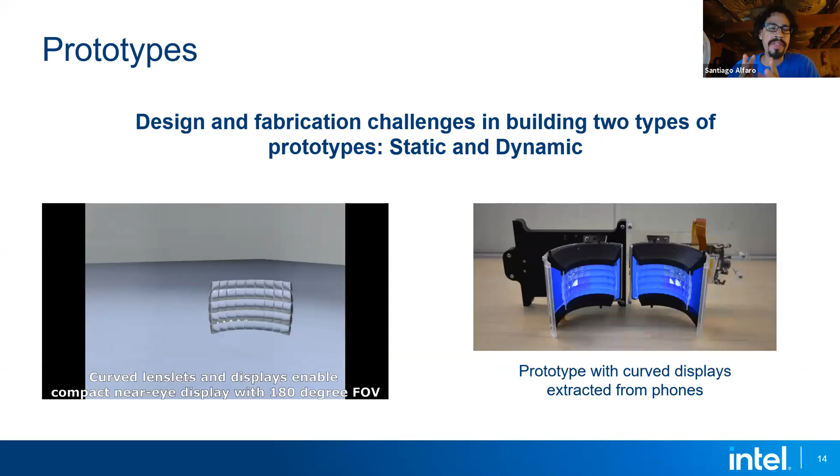Okay, so hello. So for this project, we developed 2 prototypes. As you can see here, one was a static prototype and the second one was a dynamic prototype. The static prototype was using a film and the dynamic was using a couple of cell phone screens. And we'll get into why we went both ways. Each prototype has its own advantages.

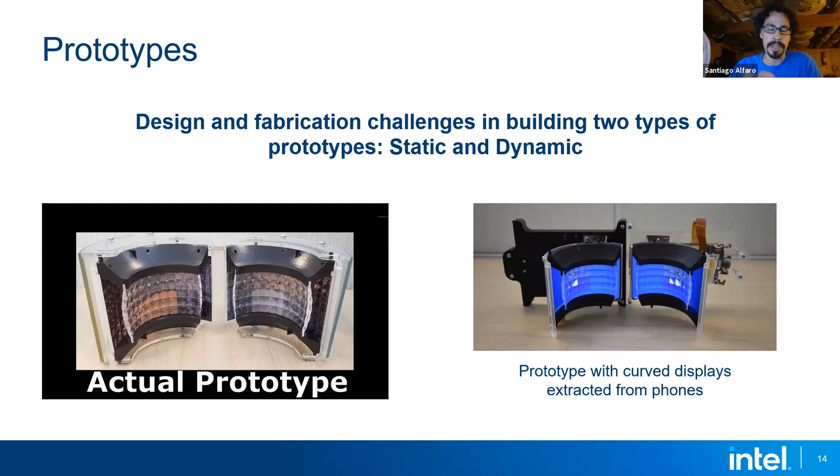So in general, first we have to design the whole thing. There are constraints around the lenses that we need, and there are also constraints around making something for the human face. One of the most critical things that we needed to look into was the interpupillary distance, which is the distance between your pupils. This is a device that is going to be so close to your face that you need to match each individual's IPD.

And in addition to that, there are things, of course, like head size, nose size. I was going to have to make something that was dynamic enough that everybody would be able to use it. And then things that I couldn't move, that I had to work with, were things like the screen size, since we were going to use a cell phone screen, and the focal length of the manufactured lenses. So all of these things had to be taken into account for our final designs.

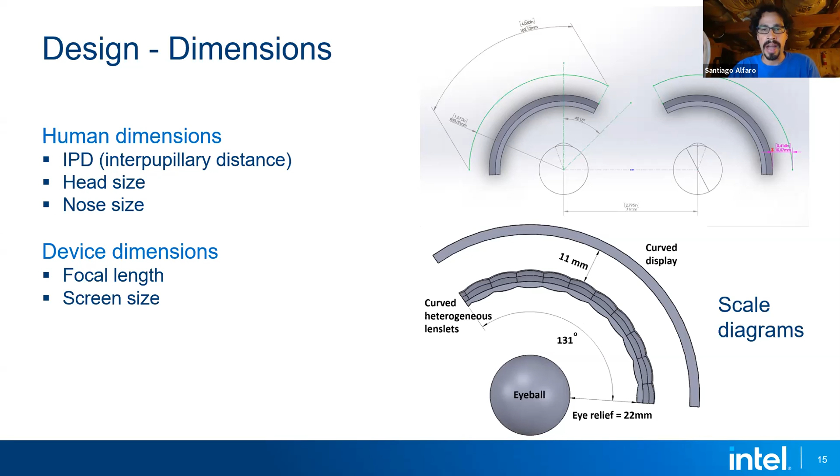So on to manufacturing the lenses. A traditional way of manufacturing lenses is injection molding, but for a research project where you only need 1 or 2 lenses, that doesn't make economic sense. Molds are too expensive and they take too long. So we went with rapid prototyping, and with rapid prototyping, there are always some caveats. We tried 3D printing in a clear plastic. We ended up going with a CNC machine that would diamond cut the lenses directly on acrylic.

Now, the problem with this, as you can see in the bottom image, is that in the computer, when we design the lenses, the joint between 2 lenses is perfectly infinitesimally small, but in the real world, it depends on the size of the diamond and the size of the bit that's cutting it. And we'll see later, this contributes to most of the artifacts that you see in the final images.

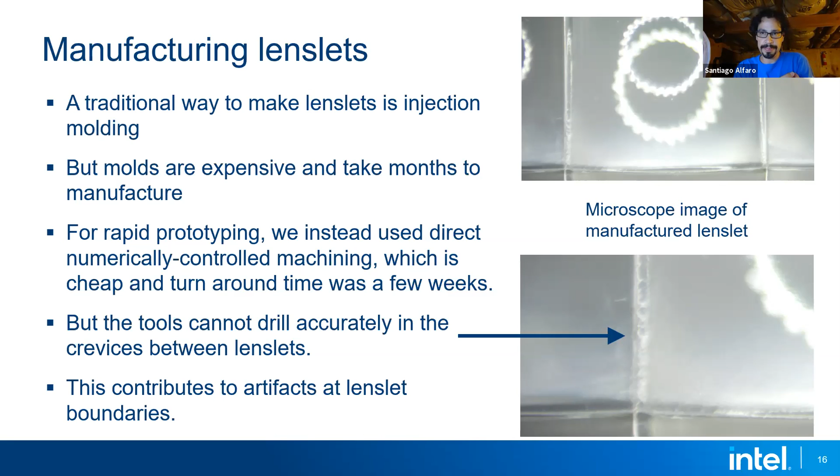So once I have the basic design and I have back the lenses that we manufactured, here's another problem that happens between the real world and the computer simulation: once you have the manufactured lenses and the manufactured parts, none of that is going to match exactly what you had in simulation. So the focal length is not going to be exactly the same. The alignment of the lenses is not going to be perfect as we wanted in the simulation.

So my device and my prototype needed to have every single knob necessary to be able to locate the lens at the right location to the screen, and both of these inside the rig, both of these in front of your IPD, and everything had to change and had to be adjusted. This is what contributes to the large size of the prototype that you see here. But as I get to know the different qualities of the manufactured parts, then everything starts to go back down and become more compact, which is one of our objectives.

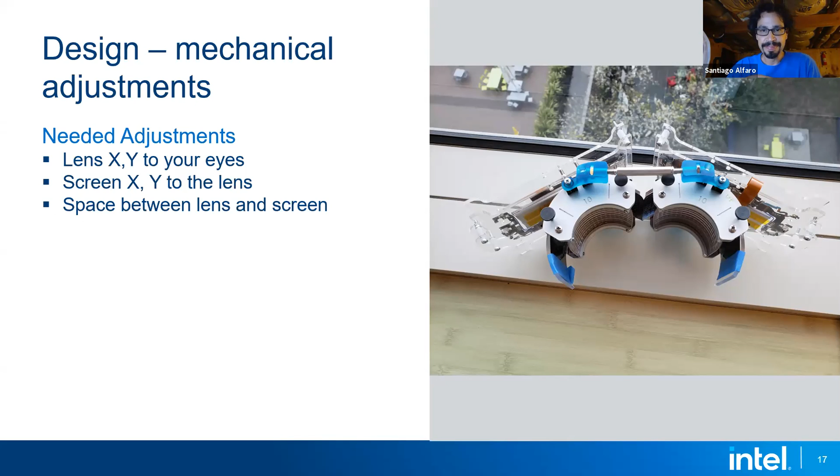So the other thing that was a problem with the static display, because we were using a printed film, is that I needed a backlight, and we couldn't get a curved backlight. So there were two approaches that I used for this. One was taking a clear acrylic cylinder and cutting it and etching it on the laser cutter so that I could use an LED array to light it from the side and have the light propagate inside the acrylic and come out through the edge. This was a good approach, but it was very hard to get an even illumination all across the backlight.

So then the other thing I did was we used an electroluminescent panel, which is easy. You can just hook it up to your power source and you can cut it whatever shape you want. From the get-go, it's a very even light, but it's not very bright. So in the end, for our final prototype, we went with the electroluminescent panel because I can live with the low light and be smart about what kind of imagery I was going to show in there.

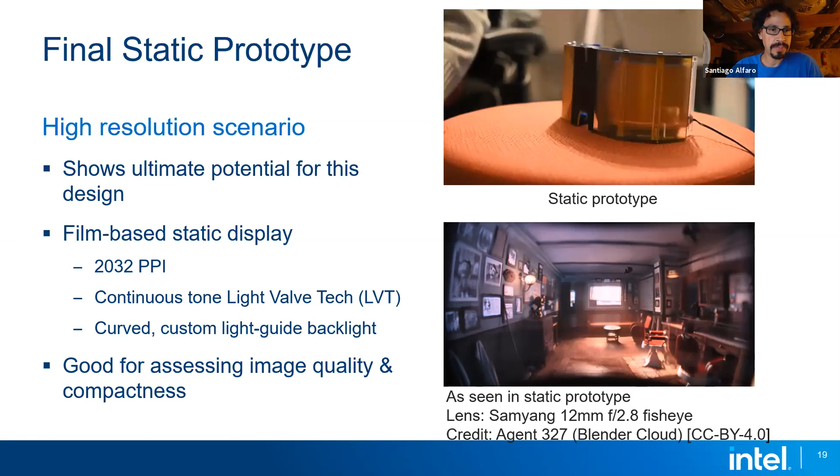So here we wanted to address another thing, which is compactness. We're offering a 180-degree field of view. So in order to compare, we took a device that was offering 180 degrees on the market, and we decided to go with the Pimax 5K, and we wanted to compare the volume.

So in order to make a fair comparison, I took the Pimax and I stripped it of all of its outer casing, all of its bells and whistles, and I stripped it down to basically the screen and the lens, only the optical elements. I did the same with my device, and then after modeling in CAD and comparing the volume, it turns out that our device actually gives us around a 50% gain in size.

So now onto the dynamic prototype. As I mentioned, we had to use a cell phone screen, and the reason is because we know that they had flexible OLED screens in there. Now, the only problem is how to get the screen out of there. We can take the screen, but the screen is still attached to the glass. Getting the screen detached from the glass without damaging the screen was a very complicated procedure.

With earlier phones, I could do it myself with dry ice, but with phones like the Galaxy S9, we actually had to go to a third party with very specific machines that would probably use liquid nitrogen to be able to do this. So we got them back, and we have in our hands what would be a 570 PPI screen that we could bend to our will.

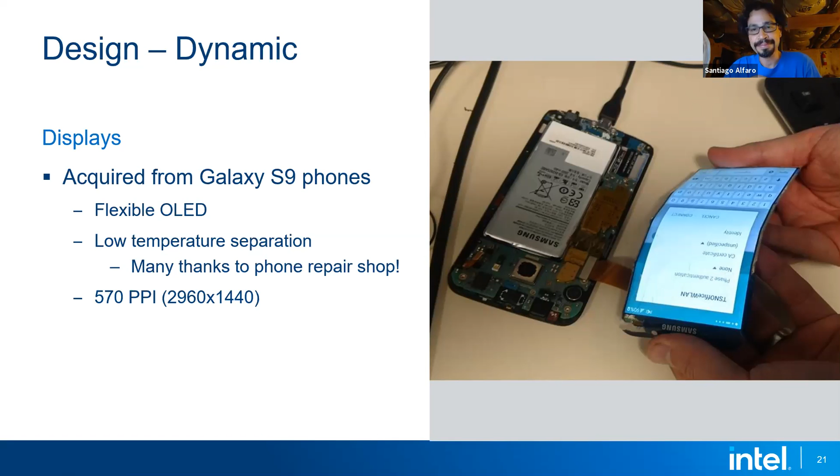So here it is, the screen. This is one of the first test rigs. And you can see how the screen is being held in the curve at the right distance from the lens. What you can also see here is the other effect of using the cell phone screen is that there is no other way to drive it or to power it except with the cell phone itself. So from here on, we realized that any prototype that we designed, or any test rig that we designed, was going to have to take into account that the cell phone had to be attached to the screen.

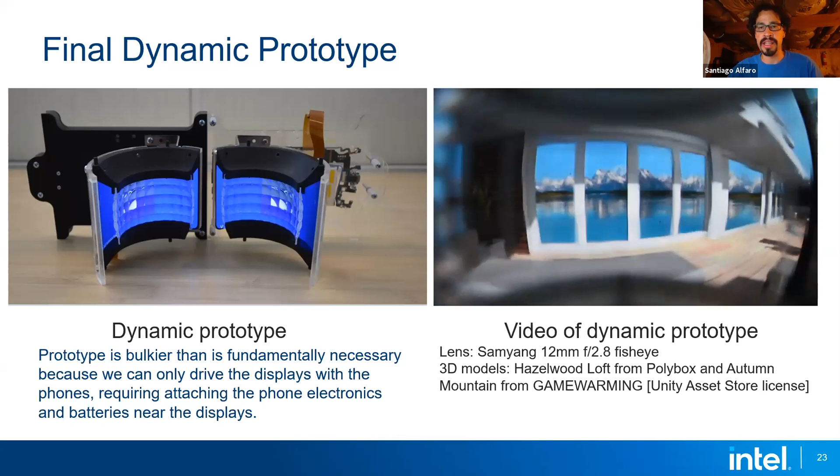But on the right, you see the actual benefit of having the dynamic screen. The resolution is a little less than the static device, but we actually are able to have animated imagery in there, and we were able to also use the accelerometers and gyroscopes to be able to create a more immersive VR experience where the device responds to your head movement. And now let me introduce Alexey with design space and optics.

Hello, I'd like to give more insight into ThinVR configuration and optics. Fascinated by compactness of near-eye light field display by Lanman and Luebke, we wanted to use the same approach to emulate regular stereo HMD. It requires solving several problems: maximize possible resolution, make HMD work at large FOVs, and make it easy to fabricate and calibrate. To be useful, the system had to be on par with then modern commodity HMDs.

So it should have comfortable eyebox, accommodating eyeball rotations. It should have anatomically sufficient eye relief that was about 22 millimeters, spatial resolution of 9 pixels per degree, assuming 810 ppi displays. The device should be thin, so display lens spacing is limited to 10 to maybe 11 millimeters. Those parameters give a starting point in design space exploration.

To facilitate easy fabrication and calibration, we preferred single lens array rather than double lens array. To address large FOV, we opted for vertically heterogeneous lens array and curved it horizontally together with the display surface. The simplest curve geometry is cylindrical centered at eyeball center. It also minimizes the number of different lenslets we need to design.

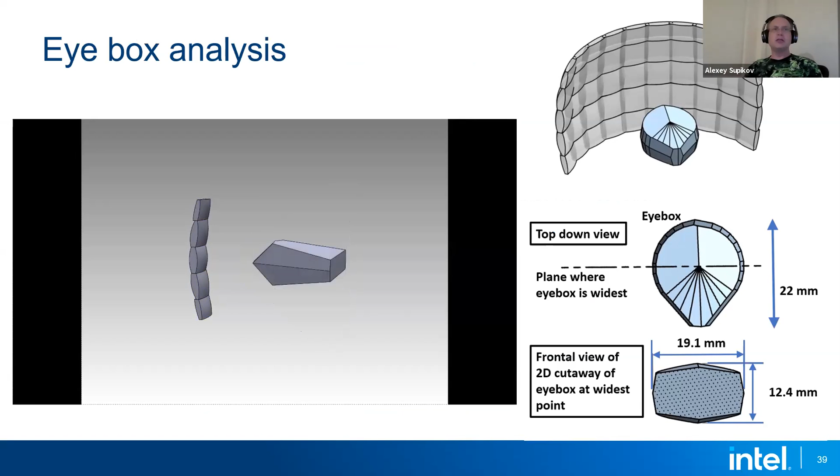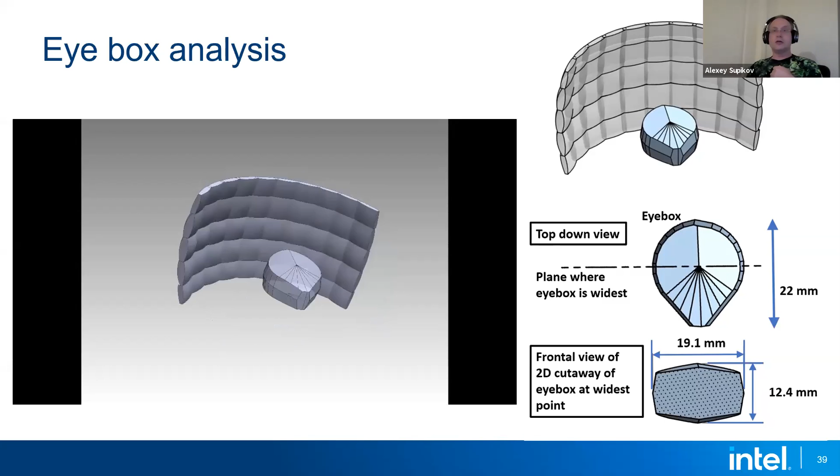Next slide, please. I want to remind that like any near-eye light field display, we trade some part of display pixels for the eyebox. We wanted to see how this 3D viewing zone volume looks like and how it compares with our conservative cylindrical estimate. And having ability to dump all the rays, we estimated a slice of pyramid fitting inside the actual curved viewing zone of each lens. Then we took an intersection of all zones and it gave us real geometry of the eyebox. And as you can see, it has nothing to do with the box at all. Even the cross section of it is not a rectangle. Next slide, please.

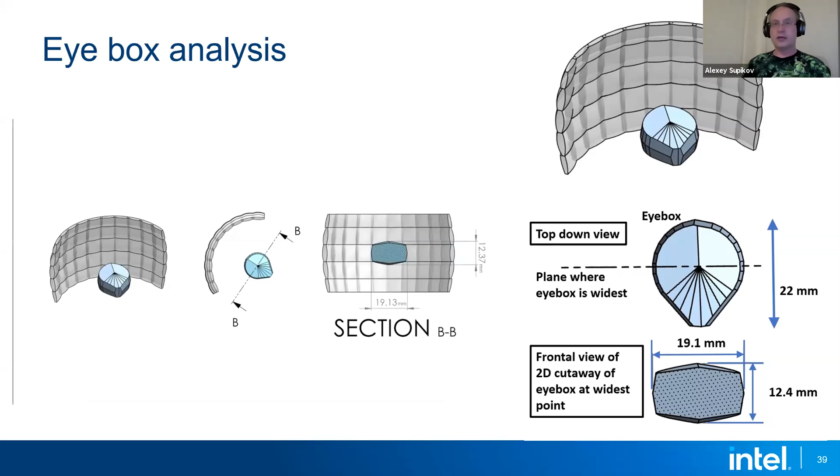Moving the camera on translation stage, we were able to verify that real system has the eyebox at intended pupil locations. And finally, let's look at FOV numbers. Our final design provides about 130-degree horizontal FOV per eye with stereo overlap, which is limited by presence of the nose on a typical human face and rectangular display shape. The vertical FOV is about 81 degrees.